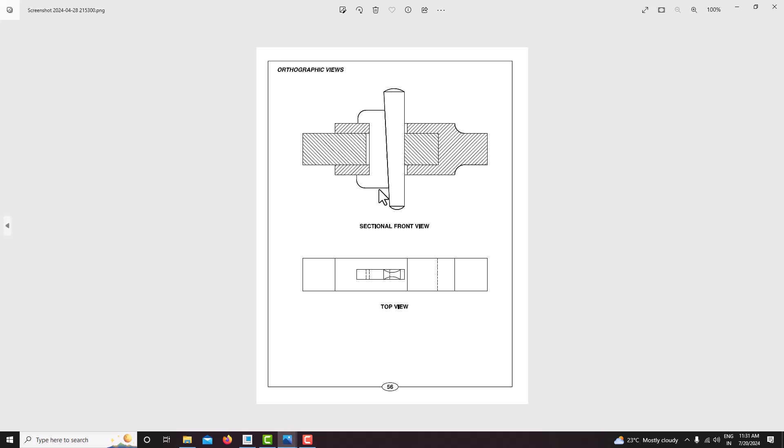We are going to assemble it using a cut section view. To do the assembly in Creo Parametric, first we need to model every component separately using part modeling, then assemble it using the assembly model. First we will start with the fork.

For that, first go to the Creo Parametric software. Here I am using Creo Parametric 8.0. First go to New. Before that we can set the working directory. Select working directory and choose the gib and cotter joint folder.

There we can save all the files, and finally we can assemble it. Now I have chosen the working directory, which is gib and cotter. Now we can go for modeling the first component, which is the fork.

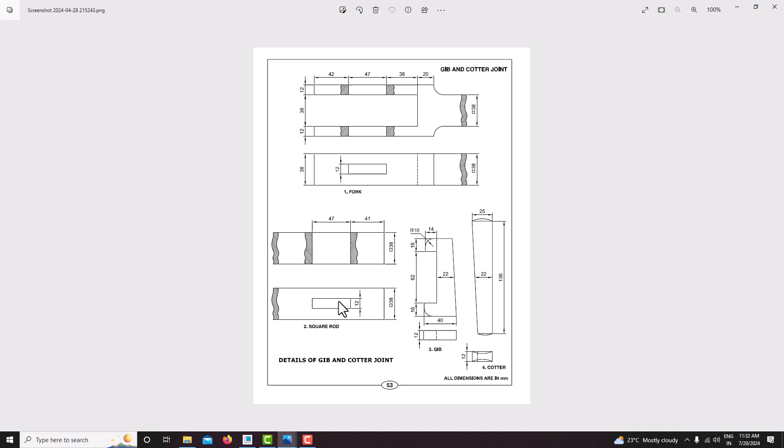Now we'll start with this fork. First go to New, Part, Solid, give any file name, untick use default template, save, OK.

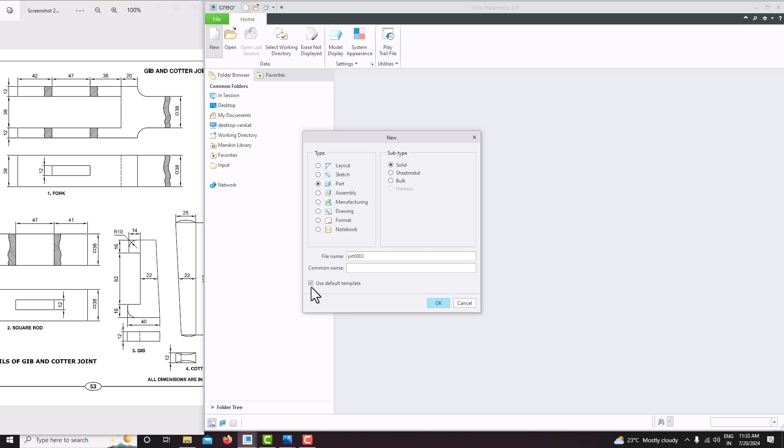Now choose the template, because our model is in millimeters, choose MMNS part solid absolute. Save, OK. Switch on all the planes and axis.

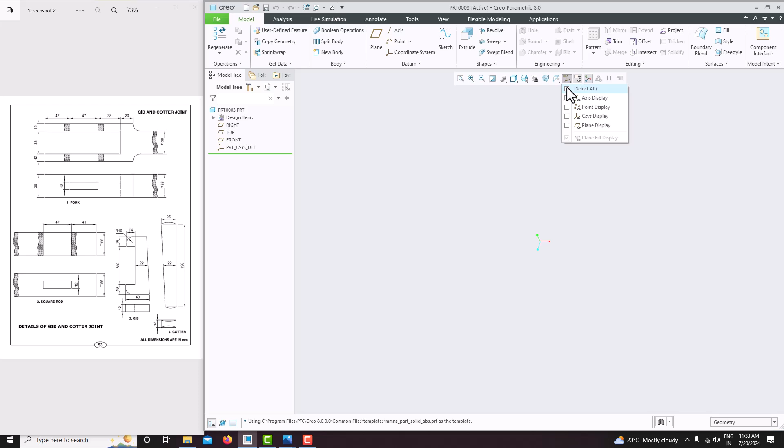Now we have an orthographic view, and from that we need to create a 3D model.

First I'm going to create this front sketch, then extrude it up to a length of 38. Here the dimension for the shaft length is not given, so we can keep some dimension ourselves. If you want to give 50 or 100, we can give it - the shaft length can be whatever is desirable.

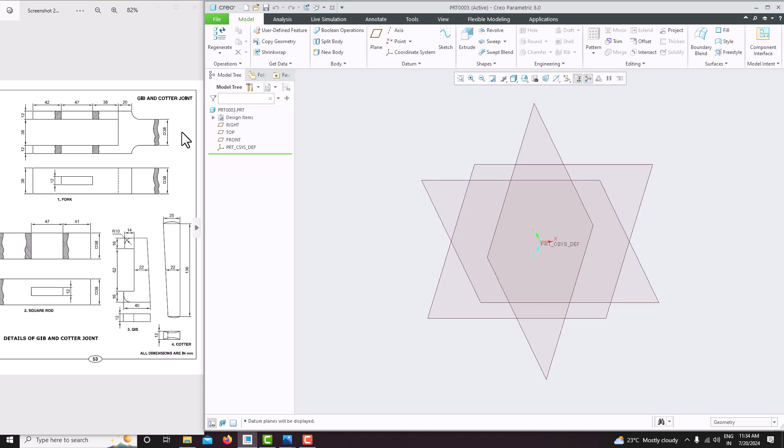First I am going to the front plane, sketch view. First draw the center line. Press the roller to confirm.

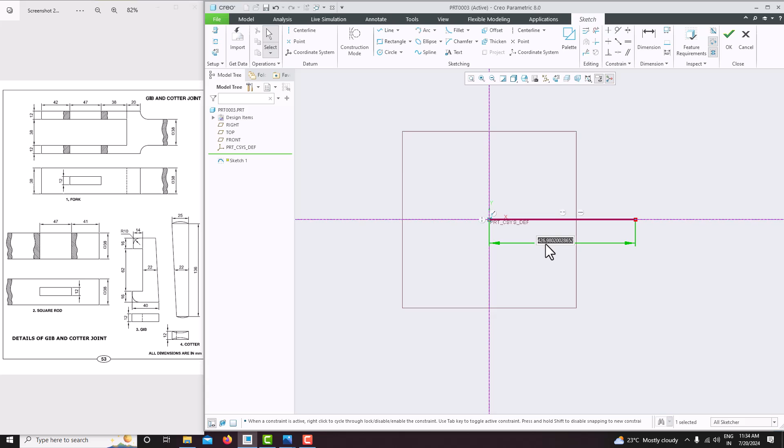Now we'll start from any one of the edges. I am going to start from this line. This total line length is 42 plus 47 plus 38 plus 20, so I am just going to draw this line. Press confirm, double click this dimension and enter the value of 42 plus 47 plus 38 plus 20. Then fit to screen. The total length of the line is 147.

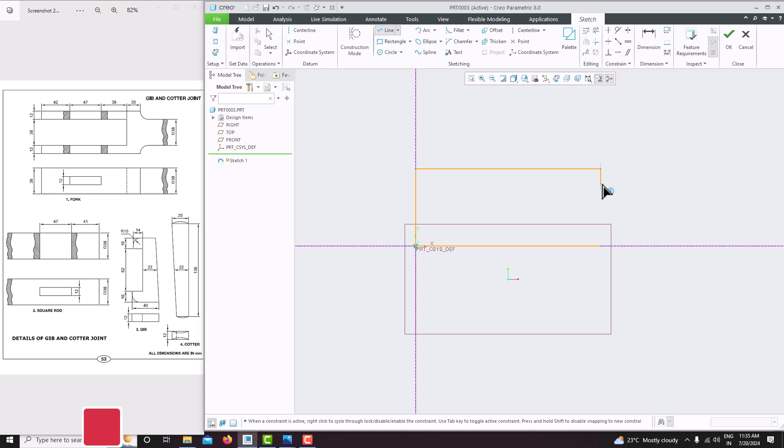Then we'll create lines one by one, or create a complete sketch, from which we can remove 38 mm. First I am going to create a full sketch, with equal length, close the sketch, and press the roller to confirm twice. Now I have created this complete sketch.

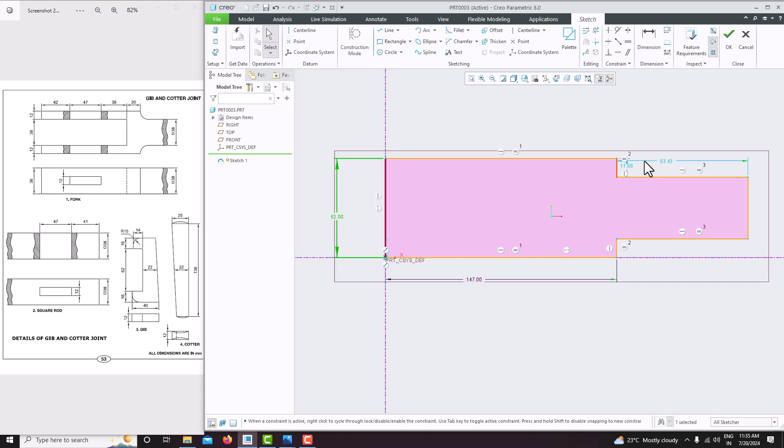Now we can specify the dimension. The total length here is 38 plus 12 plus 12, and this smaller dimension is actually just 12. So instead we can specify the dimension of 38 here.

Go for the dimension, select this line, press the roller, you will get the dimension of this line as 38. This length we can give any dimension - here I am giving 100 because the shaft length is not given. Based on the assembly we are using, we can take the shaft length. Here I am taking 100. All the dimensions have been specified now.

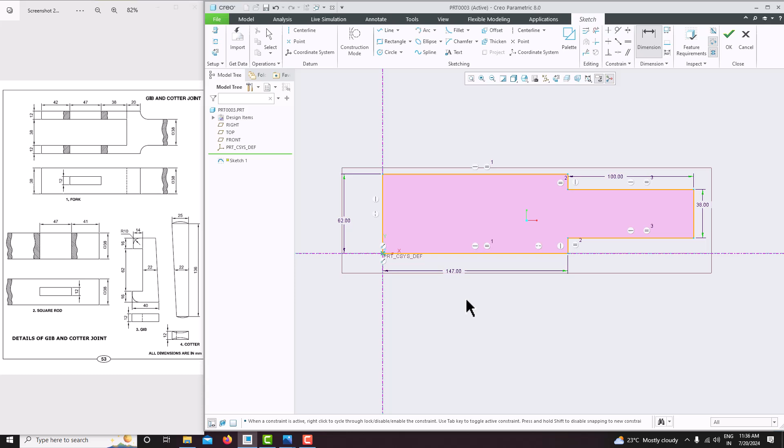Just say OK. We need to extrude up to a length of 38 - here they also mention 38 square. Then go for extrude, make it symmetric, the total length is 38. Say OK. Now we have created this first extrude.

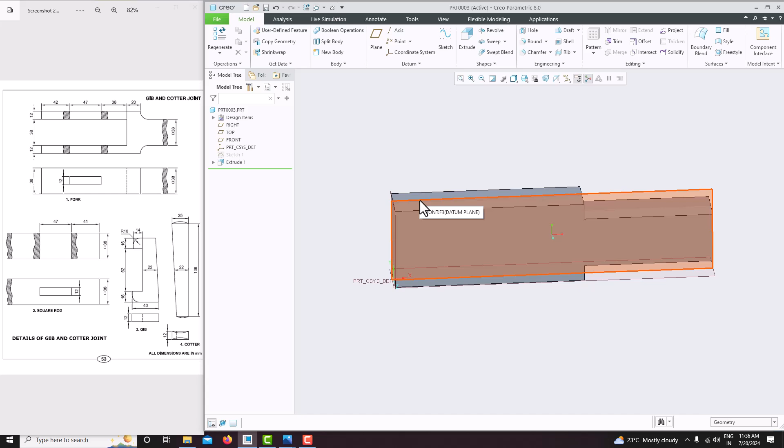Then we'll remove this cut. Select this surface - we can select by plane also. Now I am going to use this surface, sketch view.

Now just simply take a corner rectangle and draw a rectangle. Press the roller to confirm. Now this height is 12 mm - here you can see this one is 12 and this height is 38, and this length here is 38 plus 47 plus 42.

Simply just add 42 plus 47 plus 38. Just enter it, it will add and give the value which is 127. Now we have specified the dimension. Just say OK, now we need to extrude this sketch.

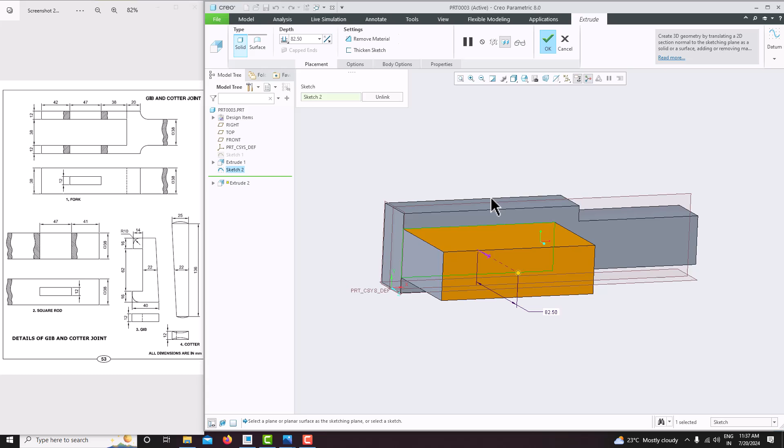Just go for extrude, change the direction, here we make it To Next, make sure your remove material is selected. Say OK. Now we have created this cut.

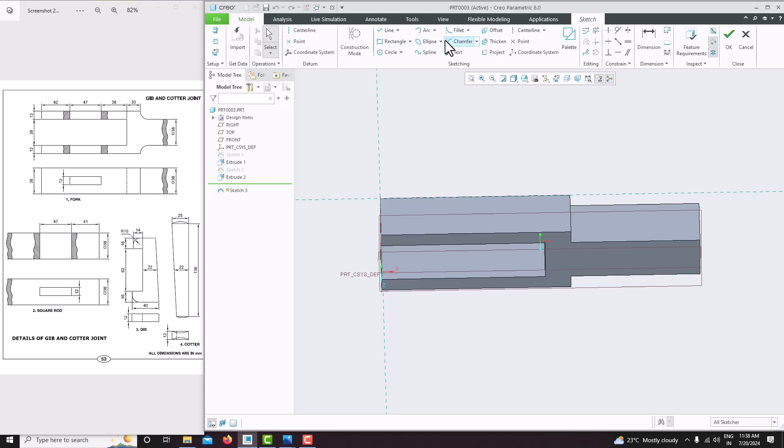Then we need to create this cut at the top surface with a length of 12, located 42 from the left side edge. So simply rotate it here, select the surface, sketch view. Now we can take a reference also, this mid one.

Then close it, take a small rectangle and draw it here. Press the roller to confirm. Here you can make it symmetric also, about this axis.

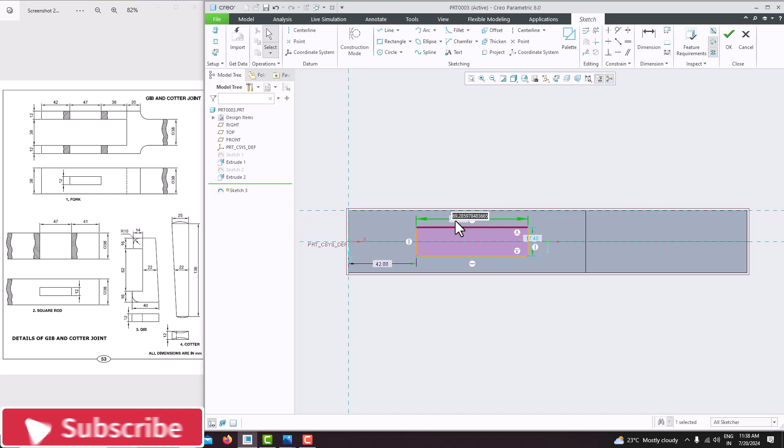Now this distance is 42, so just change this value to 42. And this total length is 47 - here you can see this one is 47. And this thickness is 12 mm, so the cut thickness is 12. Now we have specified all the dimensions.

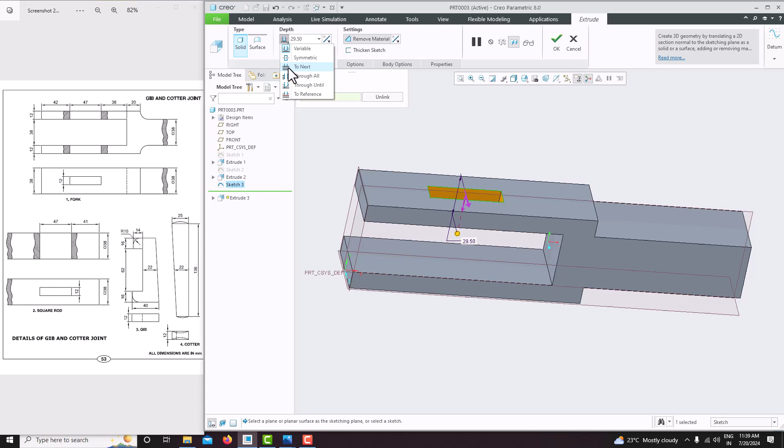Just say OK, then go for extrude, change the direction. Here we should not do To Next - it will go up to this surface only. Just edit it, we need to go for Through All, then only it will remove material throughout the body. Make sure you are in remove material and say OK.

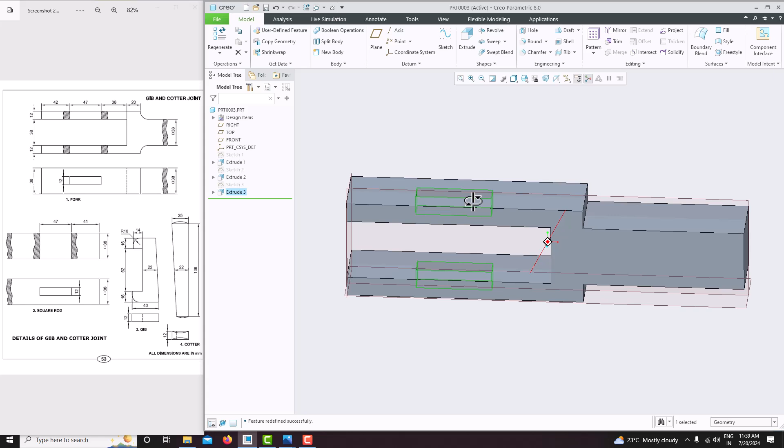Now we have created almost the part. The only thing is we need to create this round. For that just choose the round.

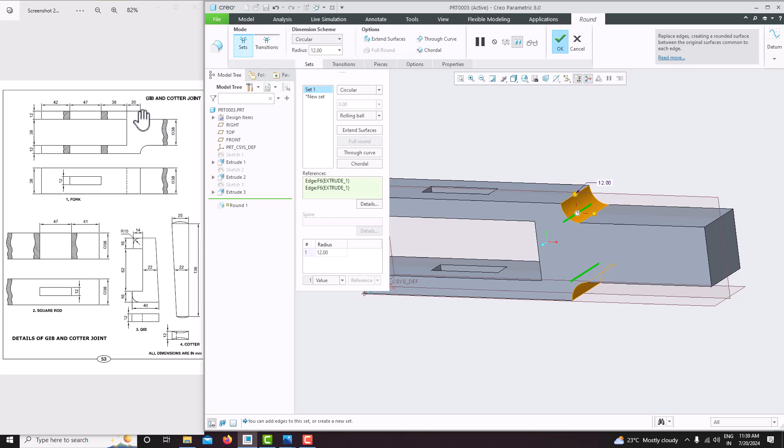Select this edge, press Ctrl and hold, and select this edge also. Now we need to specify the radius. Here they are not specifying the radius of this round, so ourselves we can take this radius as 12, because this complete radius they have given, so we can take a radius of 12.

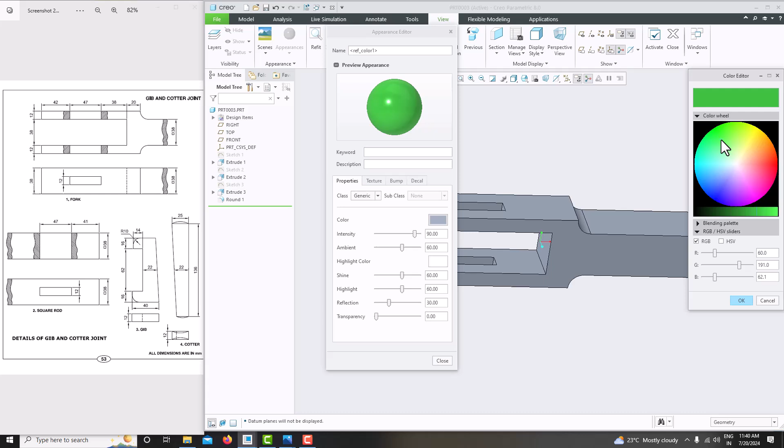Save, OK. Now just hide all the planes, go for standard orientation. Now we can apply any color also - go for View, Appearance, More Appearance. By clicking this, we can choose any color. Close, and just apply it to the complete part.

Save, OK. Now we have finished this fork.

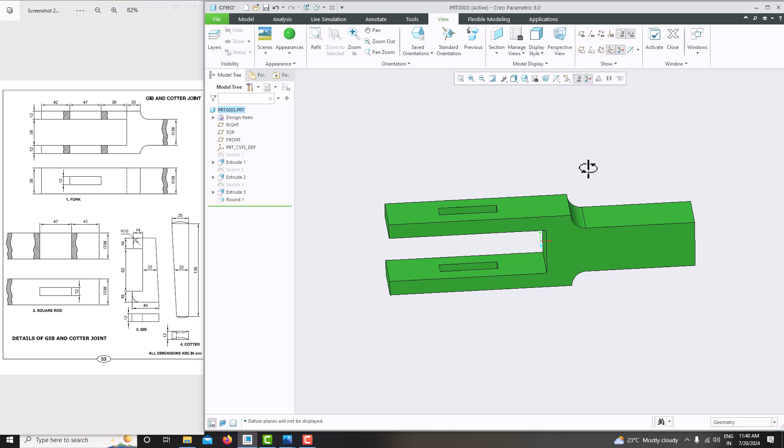In the next tutorial, we'll see how to model this square rod. Thank you.